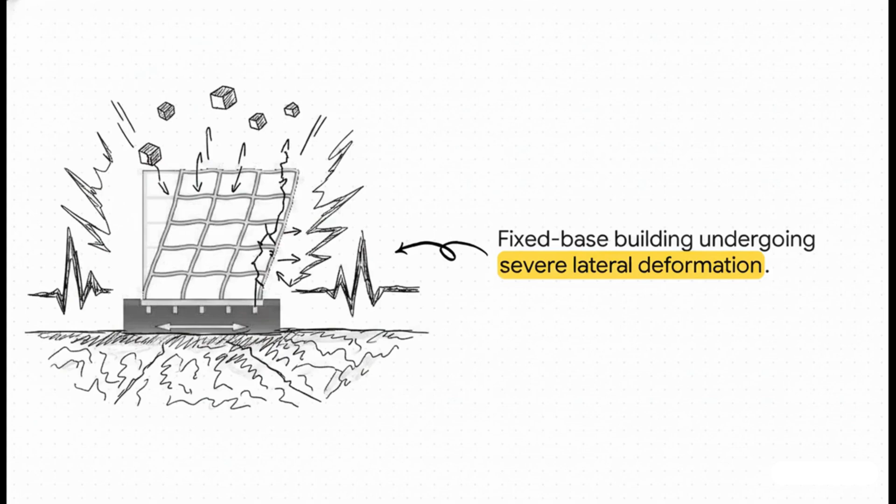The whole building ends up acting like this giant, rigid shock absorber, just taking the absolute full brunt of the Earth's dynamic excitation. Which brings us to the million-dollar question structural engineers have been agonizing over for decades. How do we actually stop an earthquake from just tearing a building apart?

Now, the traditional answer has always been brute force, right? Just add more steel, pour more concrete, add more mass. But what if the ultimate solution isn't building a tougher boxer, but a smarter one? What if the best way to survive the fight is to, well, just stop fighting the earthquake altogether?

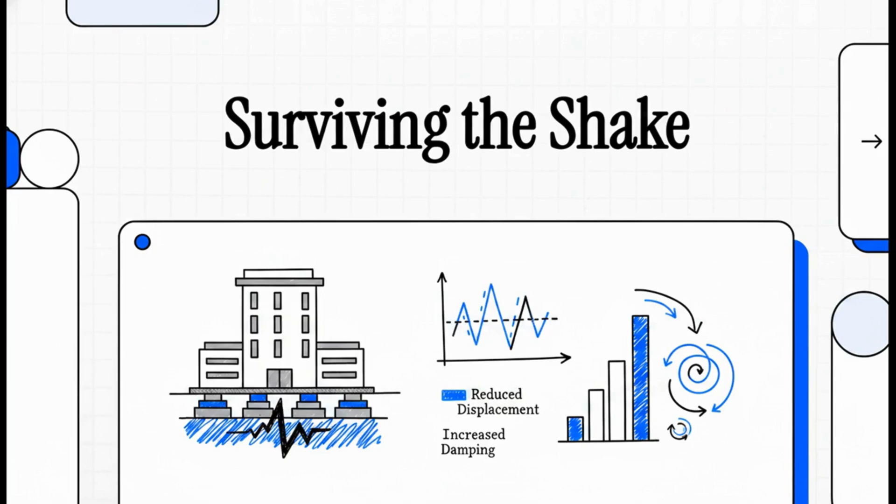Okay, let's dive right into this. Welcome to today's explainer, Surviving the Shake, the physics and data of base isolation. I'm super excited to walk you through this one. Today, we're going to break down the exact engineering mechanics that allow buildings to literally float above a seismic event. And of course, we'll be looking at the hard, empirical simulation data that proves it actually works.

Here is our roadmap for today. We're covering 5 key areas. First, the fixed base problem. Then, the mechanics of isolation, the experimental setup, decoding the data, and finally, rethinking structural demand. Let's kick things off with Section 1, the fixed base problem.

All right, to appreciate the fix, we really need to understand the baseline physics of a standard, rigid structure first. In a traditional fixed-base system, the superstructure is rigidly attached to its foundation, and from a physics standpoint, that creates a massive vulnerability. See, the inertia forces that develop during a quake are directly proportional to 2 things: the building's mass and the ground acceleration.

As ground acceleration ramps up, those lateral forces ripping through the building ramp up right along with it. To prevent collapse, engineers get backed into a corner. They have to continuously increase structural capacity and lateral stiffness. You're basically turning the building into a massive, rigid target.

Which brings us to Section 2, mechanics of base isolation. Let's look at the physical hardware that completely rewrites this whole destructive dynamic. What we have here is a spherical sliding isolation bearing, strategically positioned right between the building foundation and the column base. Whether engineers go with a sliding friction pendulum system like this, or maybe laminated elastomeric rubber bearings, the mechanical goal is exactly the same.

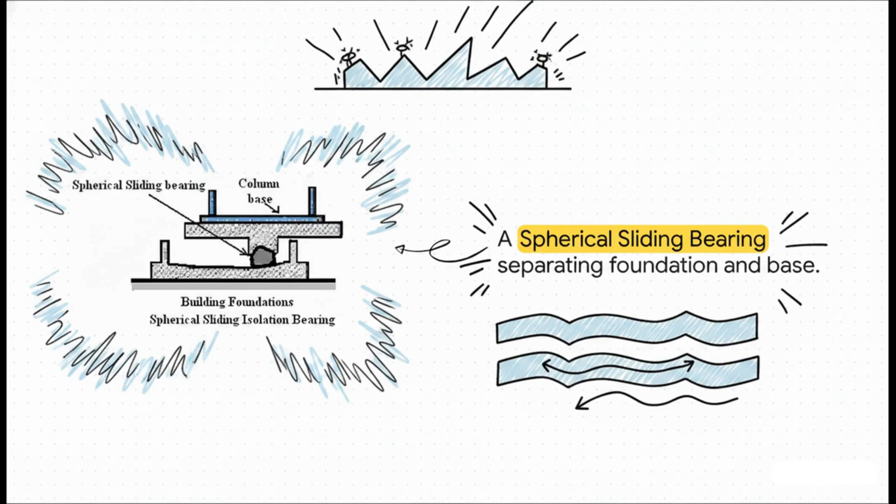We want to introduce a highly flexible, decoupled layer right at the foundation. We are structurally separating the building from the very ground it sits on. And this brilliantly illustrates the resulting shift in structural behavior. In a fixed building, you get these huge induced forces causing massive lateral displacement in the superstructure itself. I mean, that is exactly what causes your concrete to crack and fail.

But when you look at a base-isolated structure, it's a completely different story. The internal structural forces are incredibly small. The building itself stays relatively stiff and still, while massive lateral movement is accommodated entirely within the isolators down below. The earth shakes, the foundation moves, but the superstructure, it's just safely gliding above the whole shebang.

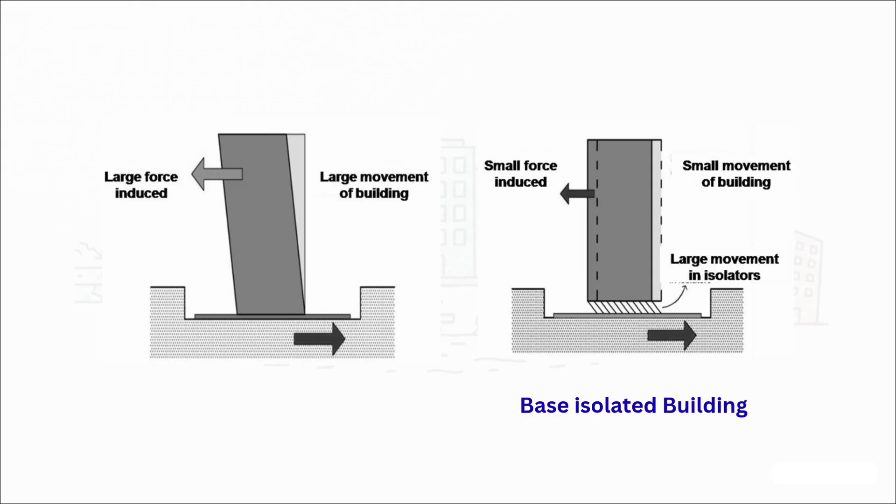Now, to truly grasp the engineering magic happening here, we have to talk about the fundamental time period. Think of this as the natural rhythm, the exact amount of time it takes for a building to complete one full cycle of side-to-side movement. Earthquakes pack almost all their destructive energy into highly specific, very rapid frequencies.

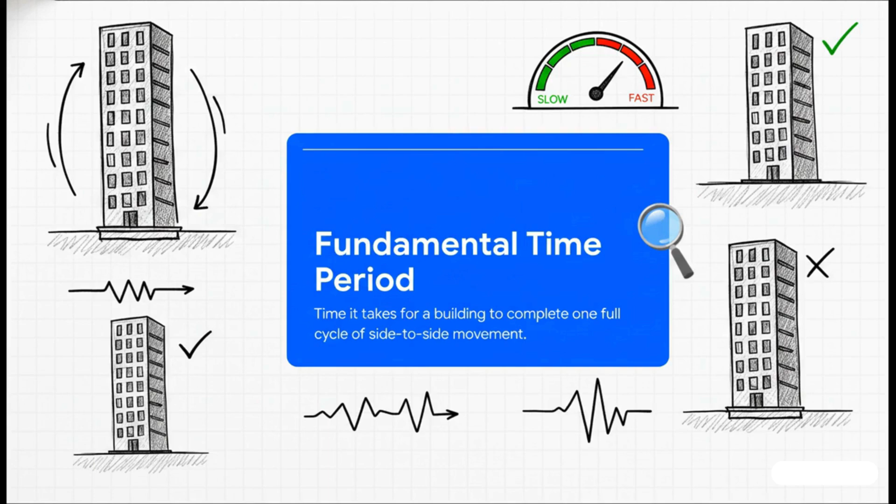By introducing that flexible isolation layer at the base, we are drastically increasing the building's fundamental time period. We are essentially slowing down its natural sway and shifting it completely out of the earthquake's high-energy danger zone. Moving on to Section 3.

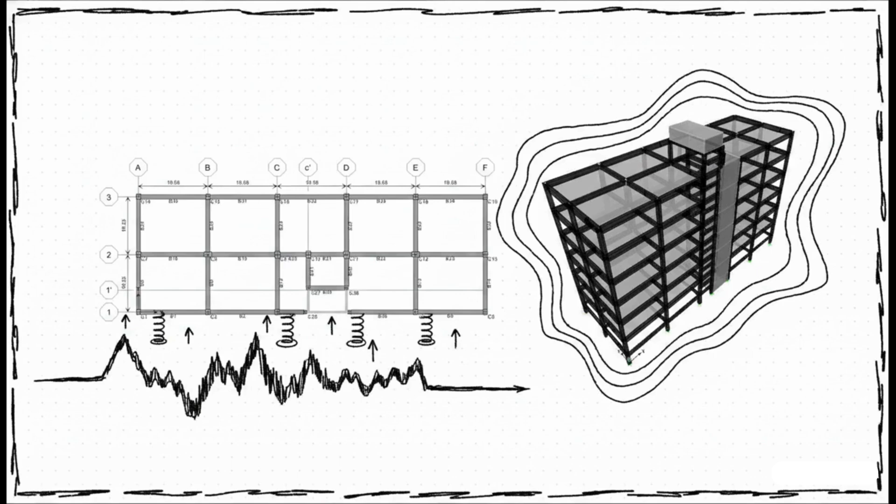It's one thing to understand the theory, but let's actually look at the simulation methodology researchers used to empirically prove this concept. Structural engineers went in and rigorously modeled 2 identical, 6-story reinforced concrete residential buildings to compare their journeys through a simulated seismic event. They built a digital twin scenario in ETABS using finite element modeling. One building is rigidly fixed to the ground, and its exact replica features rubber base isolators under every single column.

To actually test these models, the researchers ran a time history analysis. Now, if you're a structural design student, you already know this is the absolute gold standard. It's a step-by-step numerical evaluation that analyzes the structure's dynamic, hysteretic response. Basically, that means looking at how it absorbs and dissipates energy through cyclic loading, and it does this frame by frame over time during the dynamic excitation. It lets us observe the precise second-by-second internal stresses and deformations of both digital twins as the simulated earthquake just rolls right through them.

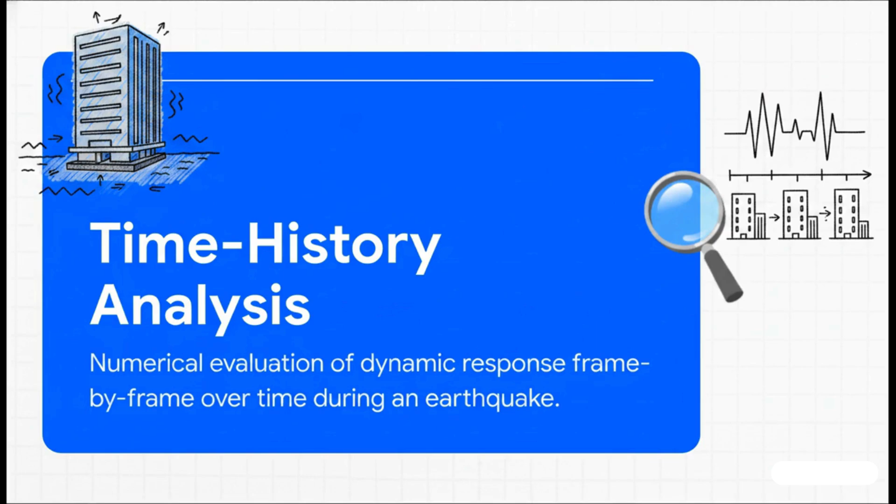All right, Section 4, decoding the data. Let's see what happened. Now, what's really interesting here is looking at the hard numerical results. This is the dramatic climax of our comparative analysis. The simulation revealed a massive mathematical shift in the isolated building's natural rhythm. The fixed base building clocked a fundamental time period of 0.47 seconds, but the base isolated structure? It lengthened its period to 0.604 seconds. Guys, that is a whopping 28% increase in its fundamental time period.

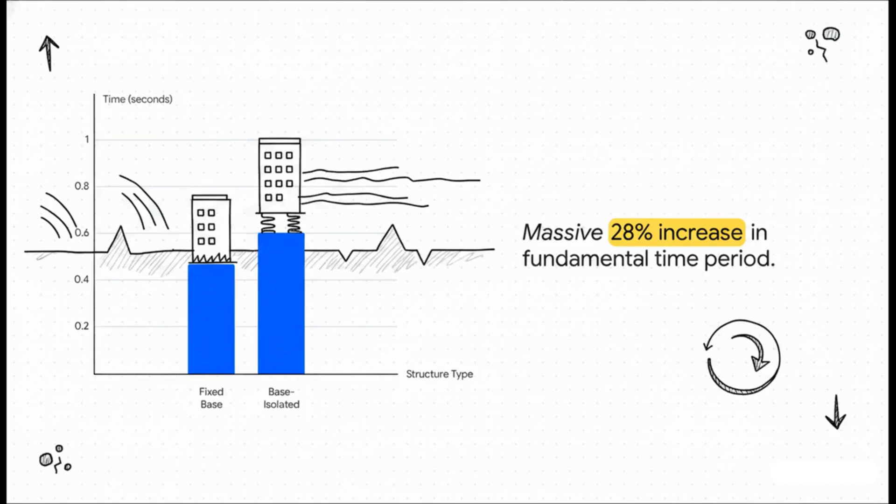So what does this all mean? The absolutely crucial point is this. Lengthening the period equals escaping the destructive frequency. By shifting that natural period by 28%, this mathematical change actually acts as a physical filter. It fundamentally blocks those rapid high-energy ground motions of the earthquake from ever violently transmitting up into the superstructure.

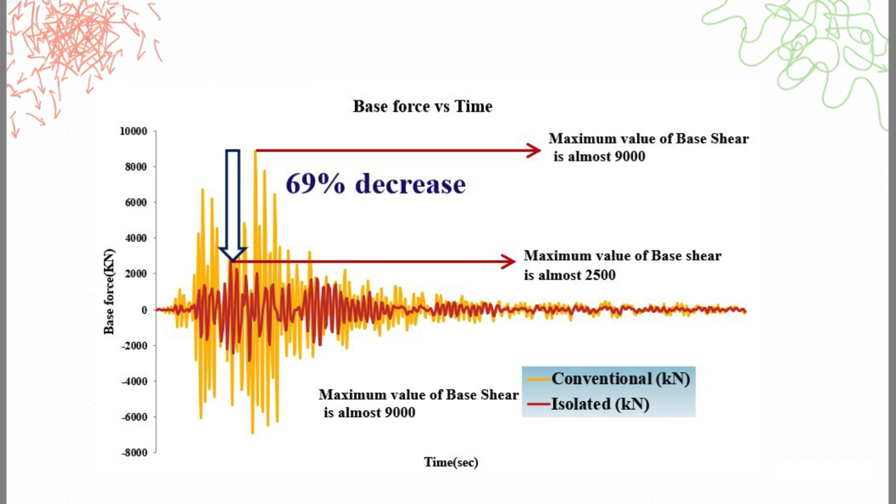Next up, structural response reductions. How did that 28% shift actually affect the physical stress on the concrete and steel? Well, prepare yourselves for a staggering plunge in structural distress metrics. The simulation revealed a massive 69% reduction in base shear. Base shear is the maximum expected lateral force that'll rip through the base of a structure due to seismic activity. So by introducing that flexible isolator, nearly 70% of those ripping forces were totally neutralized before they even had a chance to touch the structural columns.

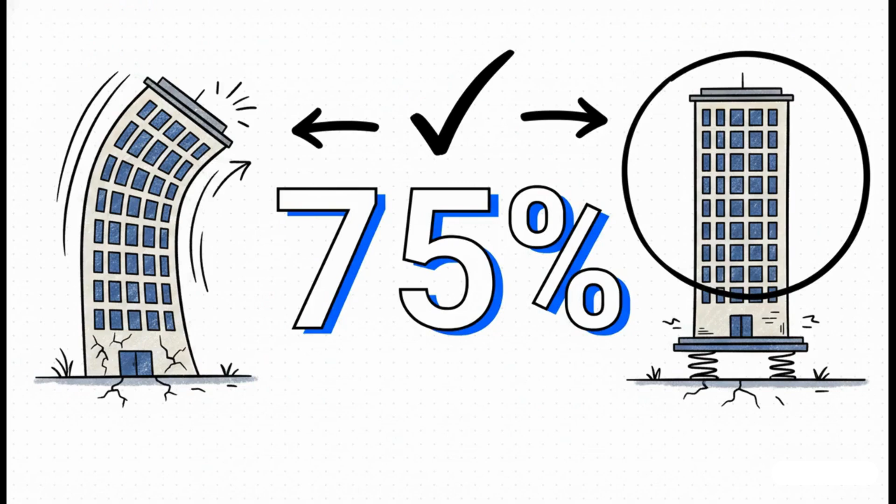That's incredible. And to punch the impact even further, the researchers recorded a 75% decrease in top-story acceleration. In fixed buildings, you know the top floors often whip violently back and forth, acting almost like a reverse pendulum. That's what causes severe concrete plasticity and, ultimately, collapse. A 75% reduction means that whipping effect is practically eliminated. The top floor of the isolated building stays remarkably calm compared to its fixed-base twin.

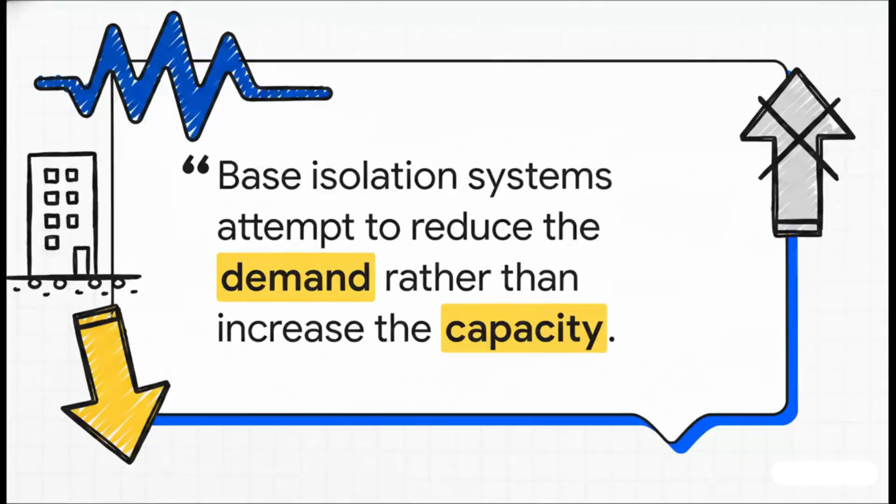Finally, let's wrap up with Section 5, rethinking structural demand. It's time to bring all this simulation data back down to earth by examining the overarching engineering philosophy it proves. The research paper summarizes this whole paradigm shift with one brilliant quote. Base isolation systems attempt to reduce the demand rather than increase the capacity. This right here is the ultimate lesson in modern structural engineering. We obviously can't control an earthquake's power, but through highly intelligent design, we can profoundly modify the demand placed on our architecture. Let's contrast these two paradigms side by side to really cement your main takeaway.

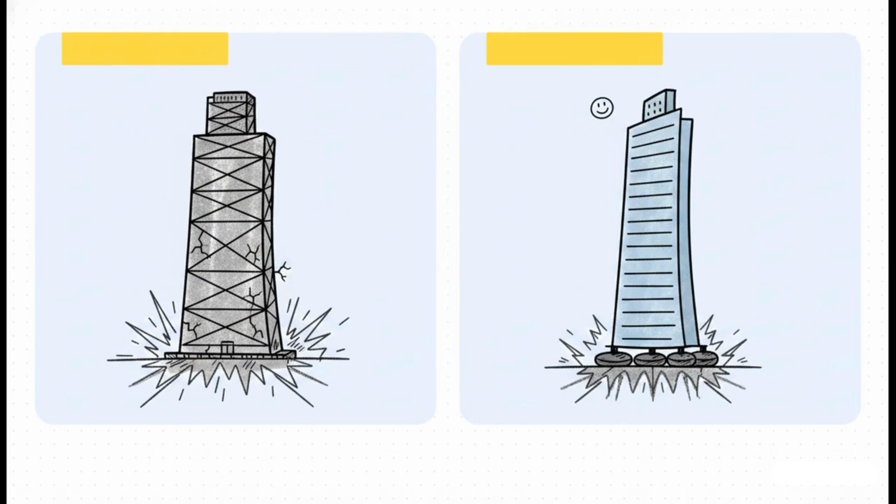On one hand, we have increasing capacity, adding thicker concrete, heavier mass, and immense stiffness to just stubbornly fight seismic forces head-on. On the other hand, we have reducing demand, using base isolation to gracefully decouple the structure, fundamentally bypassing the physics of the earthquake and avoiding absorbing those forces altogether. One approach relies entirely on brute force, the other relies on physics.

So I'll leave you with this final, provocative thought. As urbanization pushes our cities deeper and deeper into high-risk seismic zones, is it time we finally stop building structures to fight earthquakes and start building them to float above them? Let that visual metaphor sink in as you approach your next design challenge.